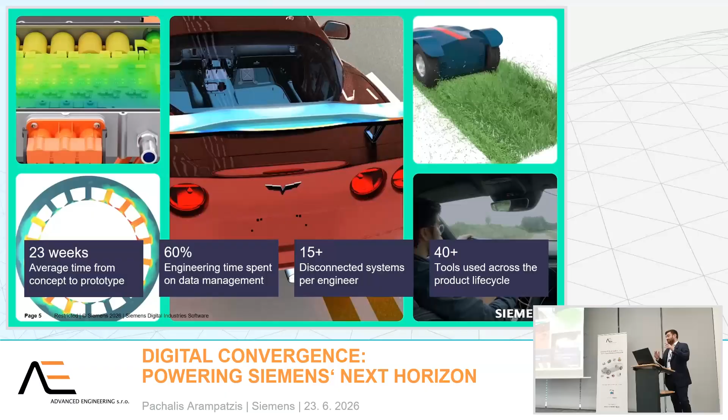Moving beyond traditional simulation solutions, we see that our customers face enormous challenges. We understand that they face advancing time-to-market needs, escalating product complexity, and productivity constraints. It's no longer enough to bridge the contact between the physical and the digital world; we have to eliminate it. We understand that we have to innovate faster. We at Siemens understand this challenge. We understand that engineering is powerful, but is currently fragmented between different versions, different systems, different teams.

But before we get into the glimpse into the future, let's acknowledge where we are. Currently, we are already saving billions of dollars for our customers by reducing the number of prototypes with best-in-class simulation.

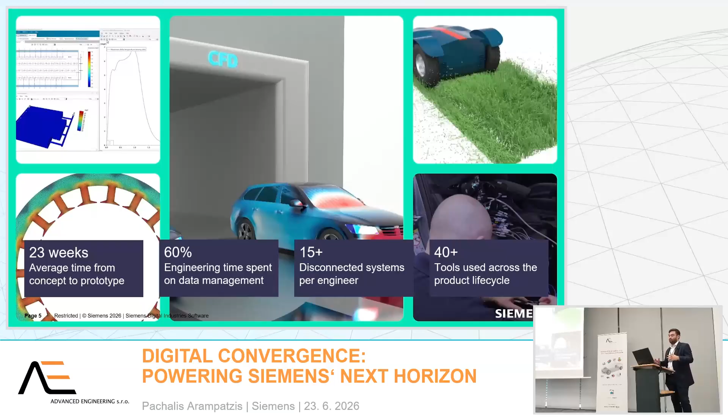But we understand that currently simulation is slow. For example, pre-processing alone can take up to 10 hours for 300 parts. Solving time can be from 45 minutes to 20 hours. Add to that 4 hours for post-processing. And if you want to do a design space exploration or optimization analysis, that can take up to weeks.

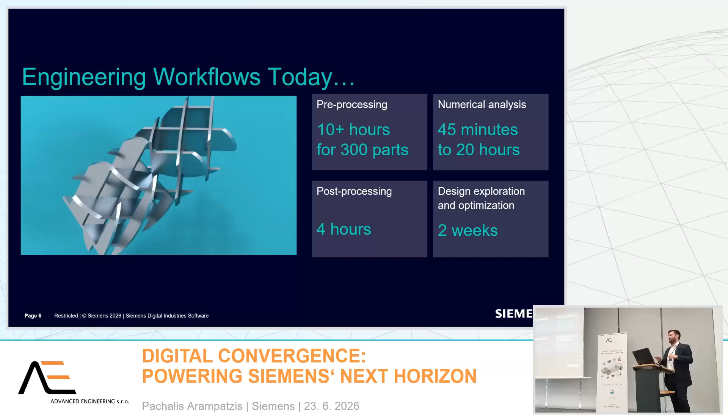Complexity is real, but wait doesn't have to be. If we can accelerate and automate each stage, we can actually compress the time from weeks into hours, without, of course, compromising the engineering fidelity, because we understand that all decisions are based on it.

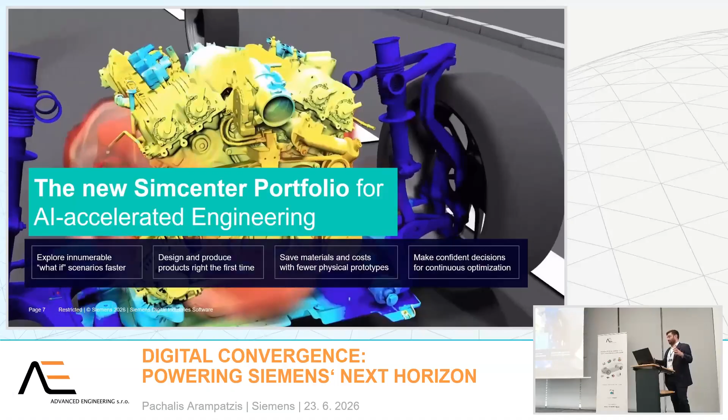That's why Altair and Siemens teamed up together to bring into life the most complete AI-powered engineering portfolio. We enable our customers to explore innumerable what-if scenarios, design and produce complex products first time right, save a lot of materials and costs by reducing the number of physical prototypes, and continue their optimization journey without having to worry about the results. But how can we save time for our customers?

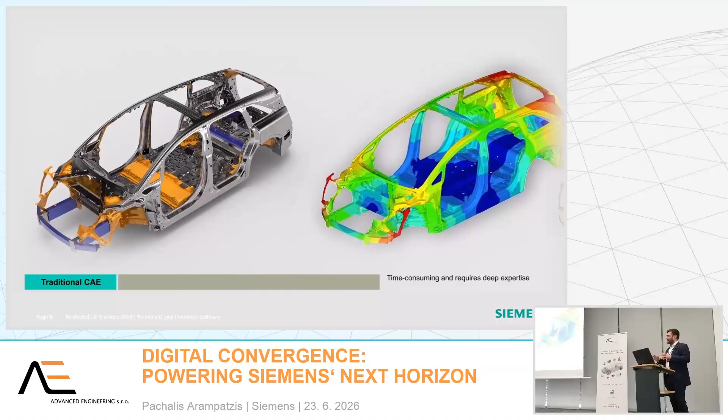We understand that validation is usually the slowest part in the design process. It's usually the gap between the CAD and the FE models. With SimSolid, we managed to eliminate that bottleneck. No simplification, no meshing, just results 30 times faster.

But we didn't want to stop there. Our next step is Physics AI. With Physics AI, we want to bring validation in real time. We want engineers to explore and validate designs instantly. For example, in the automotive world, we want to cut what used to take weeks of decisions to make it real time during the design phase.

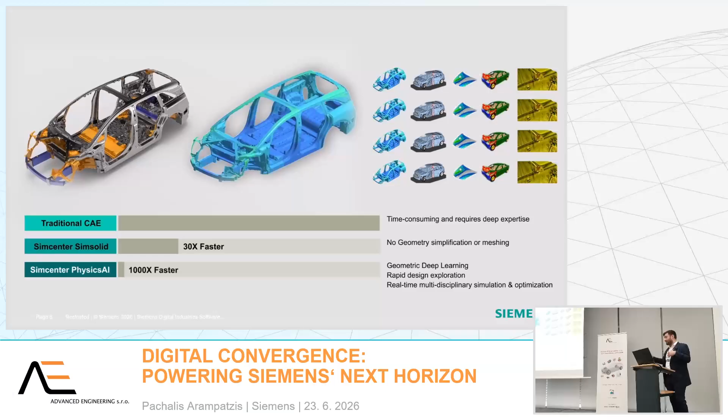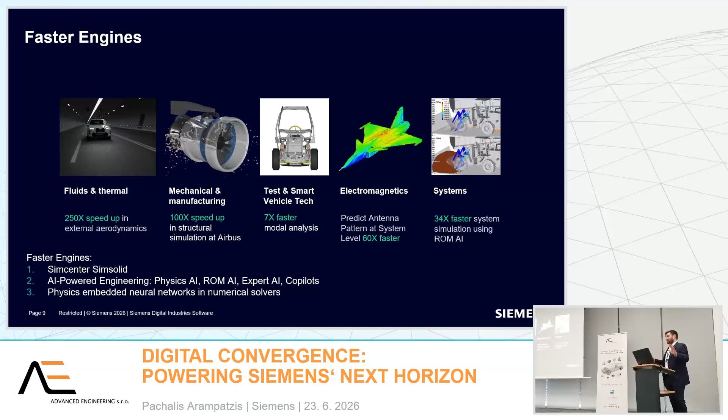We understand that engineering has never been limited by physics. It has been limited by the limitless possibilities that we have in our hands—different geometries, different configurations. Our strategy at Siemens is to use AI to explore and narrow the selection set. We do not want to change the physics engine; what we want to change is what we aim at and how we can make it scalable.

Let's take, for example, Leonardo. Leonardo had an issue with radar transmission loss caused by in-flight vibration in the helicopter's radome. What they did is use Simcenter Feko to solve this problem. They actually used a multi-physics approach in order to create a digital twin by combining the antenna's structural and electromagnetics models.

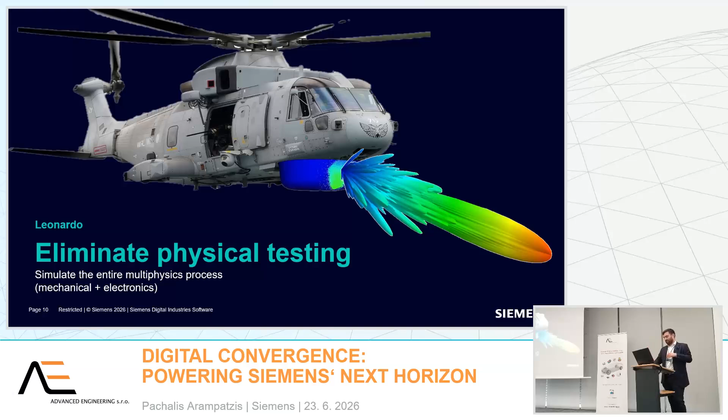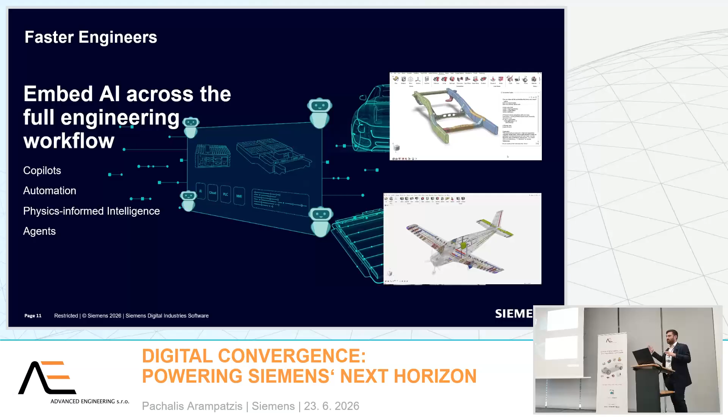Our approach is to support you at every stage of your AI journey, starting from co-pilots up to scaling to physics-based AI agents across different simulation workflows, from insight to validation.

As you can see, on the left side, there are different simulation workflows that are currently automated: finite element analysis, CFD, and even systems models. What if AI could connect all this as a thread? What if it could be a layer that moves across this digital thread and takes information from different solutions, enabling connected decisions for the teams without someone manually having to grab all this information together?

What if we can have a multi-agent orchestration layer that could transform your simulation models into actual connected knowledge that can support your decisions at every stage of your product development? We understand that engineering intelligence can help you test, improve, and optimize designs across different physics with less manual work. Your designs, your intelligence, powered by agent development and orchestration.

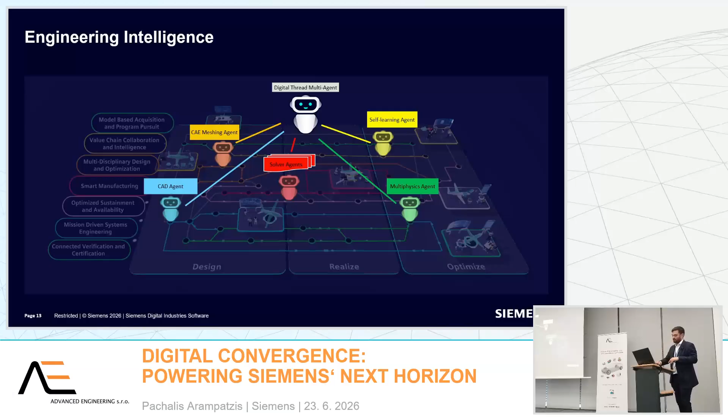Our commitment for engineers, our commitment to innovation, is to provide faster engineers and, of course, to make engineers work faster with this embedded engineering intelligence. We don't want to just add AI into your workflow—we want you to build your workflows inside an AI native ecosystem.